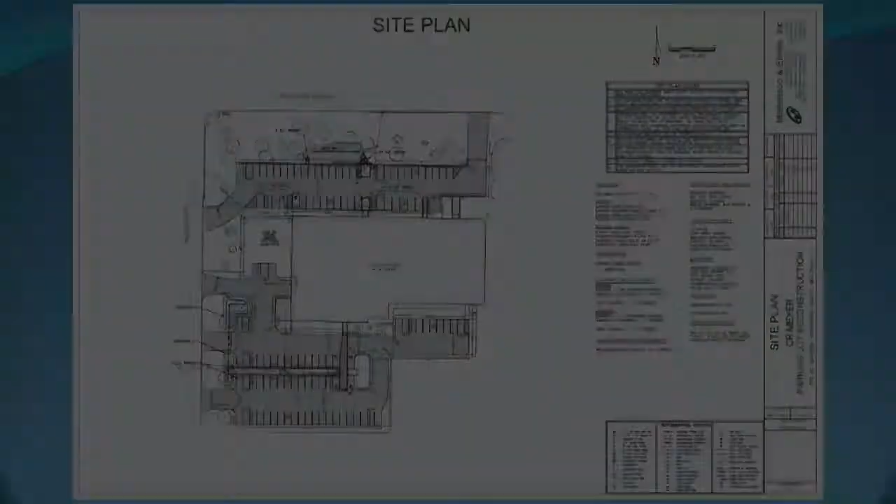Planning reviewed this and initially did not see any concerns, as it's just a replacement of what is existing. Public Works reviewed it and noted support for the variance provided the parking lot configuration and use warrant the need for all existing access points to remain per the site's current operation practices. However, after our staff report was sent out, we received notification from them that they would like to see one of the driveways along Knapp removed. So staff is recommending approval of the access control variance to increase the number of permitted access drives from a local street from 2 to 3 rather than 4 as proposed.

All right, thank you. Technical questions. Has the petitioner been told that? We just found that out today, so we were hoping Mr. Garrick from Public Works would be here as well, but the petitioner is here. Oh, so we'll hear about that later. All right, technical questions?

All right, anyone here from the public to speak to this item today? Yeah, I'm Kevin Force. Come on up, sir. Tell us your name and address, and then tell us your thoughts.

Kevin Force, 895 West 20th. So I'm part of this building.

The 4 existing driveways, if you've ever seen the post office traffic over in that area, they come in there with the big semis. We could actually come in there and have 2 of our driveways blocked by semis when they're waiting to get into their access.

Obviously, we can't live without the north one. It's our only safe access really to get out on 20th. Otherwise, the north parking lot is trying to all get out across 20th or intersecting 20th, which at times when Oshkosh truck traffic is coming down the road, it can end up being a nightmare in there.

Driveway number 2 is, we take deliveries in there occasionally by semi or larger panel vans. That gives them direct backing access into that drive. If we would give up that one, we'd have no access to our overhead door.

Driveway 2 and 3 also work with our dumpster situation. Driveway 2 is used to snag the dumpster that sits in the enclosure to the right, and then he circles out without having to back out onto Knapp. Driveway number 3 allows him to come in, pick the dumpster that sits on the left-hand side of our dumpster enclosure, and then drive out driveway number 2 in order to avoid, again, backing out into Knapp.

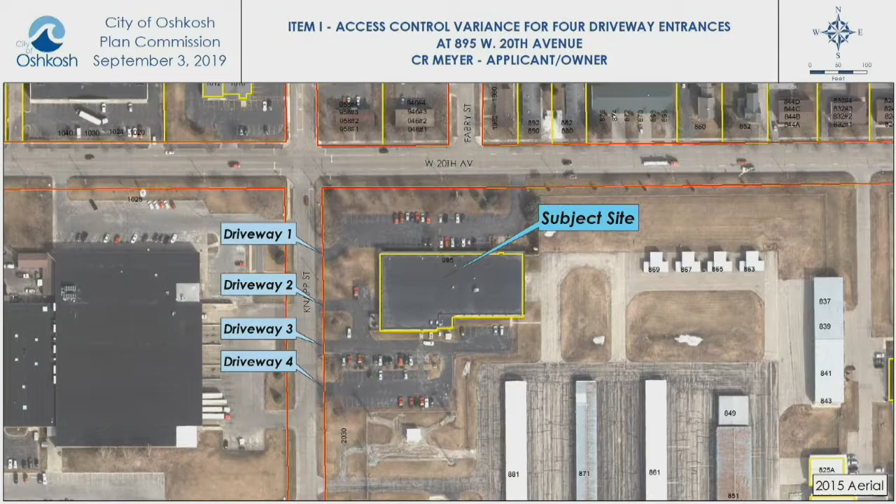Thank you. Okay, we have a motion on the floor with a second to allow them a 4th, going back to the original. Any further discussion on that? Then let's call the roll. Hintz, aye. Kiefer, aye. Palmieri, aye. Perry, aye. Mitchell, aye. Crab, Erickson, Ford, aye. Wojtek, aye. Motion carried 9-0 with amended condition, or sorry, amended motion.

No need to apologize. On to item number 2, a 2-lot land division and certified survey map located at 1732 Knapp Street. Any site inspections for this one? Okay, we've got a couple. We do accept the staff report as part of the record.

Starting in 2015, the city's consultant AECOM has done a site analysis to determine the extent of methane gas emanating from the site, and determined that these 5 properties are required for the city to move forward with its mitigation efforts. The subject property is a 2.25 acre property, developed with a single-family home, very close to Knapp Street, and also built out with associated accessory structures. The site is unusually large for single-family development, being 2.2 acres in size, approximately 636 feet deep by 180 feet wide at its widest point. The surrounding area is generally single-family in nature, with the exception of a school to the west and another former landfill site to the north, which is Quarry Park. Quarry Park also has seen methane gas remediation efforts by the city.

It is 1.36 acres in size, and the lot exceeds the minimum base standards of the SR5 zone district in regard to width, depth, and area. One little thing missing on the submitted map - I'll go to the certified survey map. The surveyor failed to show a small right-of-way dedication over here, which was platted in the early 1960s to place sidewalk around some existing trees. You can see that little notch out right there, so that will be communicated to the surveyor to correct that error.

Proposed lot 2 is rectangular shaped, and this is the subject site or area the city is looking to acquire for its methane gas remediation efforts. The lot is 215 feet deep, 180 feet wide, and just shy of an acre in size, and again meets all the minimum SR5 base standards.

One item of concern is this is considered a landlocked parcel, which means it does not have direct right-of-way frontage. The subdivision regulations require a 30-foot right-of-way access, and this fails to meet it. So they have two options to fix that: either acquiring a variance from the subdivision regulations to create the landlocked parcel, or option 2, the lot can be shown as an outlot on the final map.

Per state statute, outlots are lots not intended to be developed as a building site, and are generally intended to remain vacant or undeveloped, usually due to environmental or dimensional constraints on the property. The city does not have any plans to construct any type of structures other than methane remediation facilities, so staff is recommending changing lot 2 to outlot 1 on the final map.

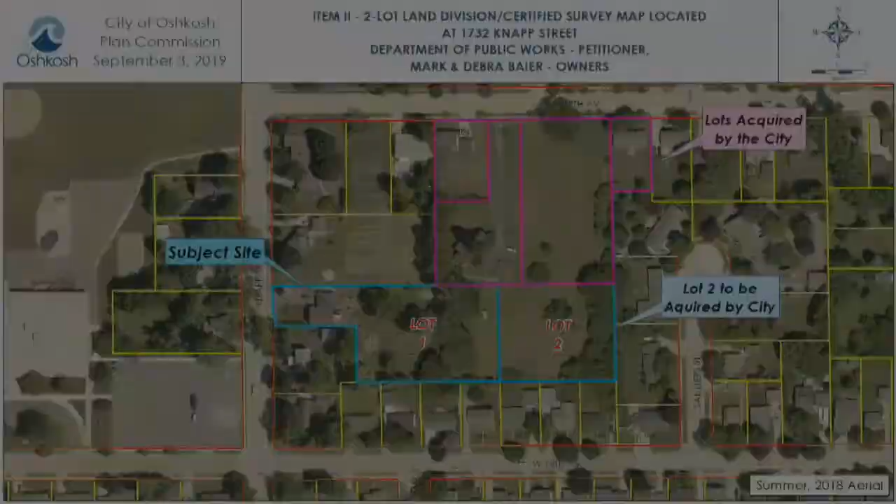This next slide is an aerial photo from 1937 showing the quarry operations, being used as a quarry at that time. You can see the 4 lots that the city has already acquired over here, and then the back portion of the subject site, which the city is in the process of acquiring, covers pretty much the entire quarry operations.

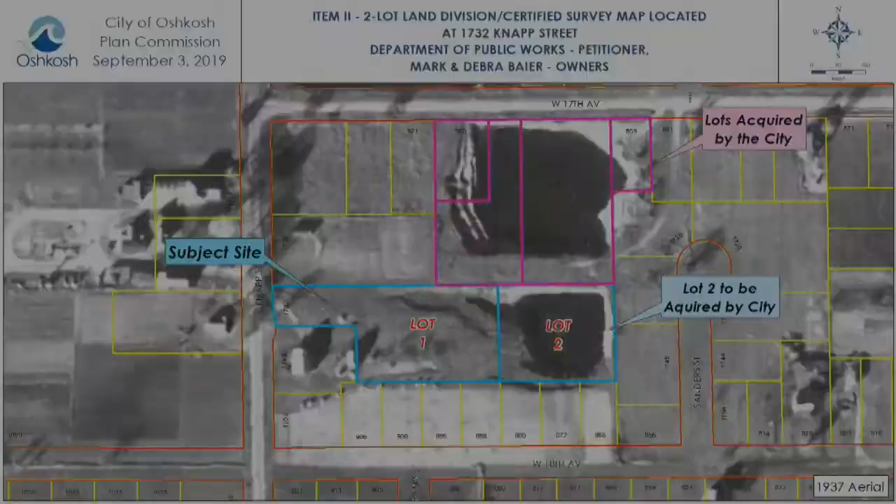The Department of Public Works reviewed the CSM and did not have any other issues other than the shared concern with lot 2 being landlocked. So with that, staff is recommending approval of the 2-lot land division with one condition: changing lot 2 to outlot 1 on the final CSM.

Thank you, sir. Technical questions? Kathy, and then the mayor.

What is a methane gas remediation facility going to look like? Public Works Director James Rabe is coming up. It will look very similar to the installation on the west side of Knapp Street at the former Knapp Street quarry, across the street from Quarry Park, where there is a system as well.

Jeff, do you have any of the air photos that could show that? Zoom in on this one here. I saw something with a fence - yep, that's it. It's an underground perforated piping system that goes into a fenced-in area where there are pumps that apply a vacuum to that perforated system to draw the methane out of the ground and then vent it.

So it would look like kind of an informal fence, like the one on Knapp Street. Would the facility look the same? It would look very much the same. I don't recall the exact design off the top of my head, but it would look very similar to that.

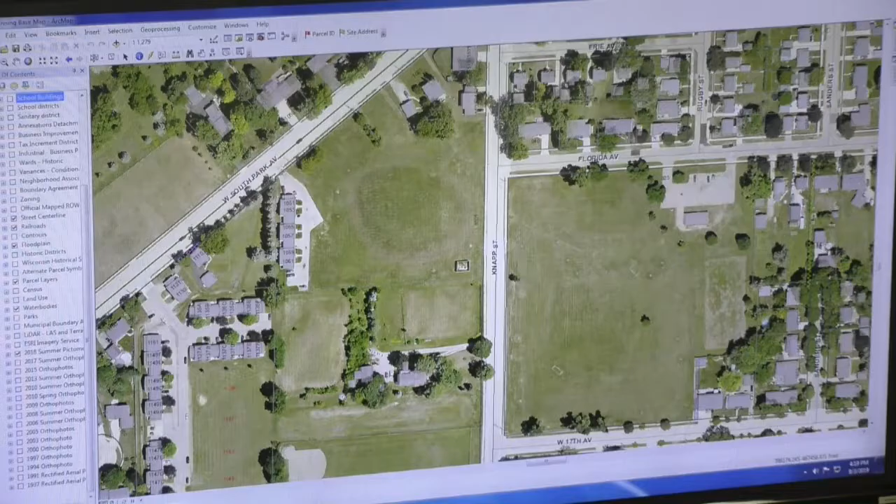Locationally, we are currently planning it to be installed somewhere near the vicinity of the current house location at 885, so it will be set back from 17th Ave quite some distance. That's where the garage is, and the house is a little - yep, that's where the house is. So it's somewhere in that general location is where it will be installed.

More questions? Yeah, go ahead. Will this take care of the possible dangers to the neighborhood now, or is there a possibility of other properties being affected? Jeff, if you could bring up the air photo from '37 again, please. The outlined northern quarry was the former Keenest quarry, and the southern quarry is the former Paulus quarry. Both of those were filled.

We know the former landfill was filled with municipal solid waste that generates methane as it decomposes, and some of that methane has worked its way into the former Paulus quarry, which is why we're also looking to acquire that land and get the methane extraction system around there.

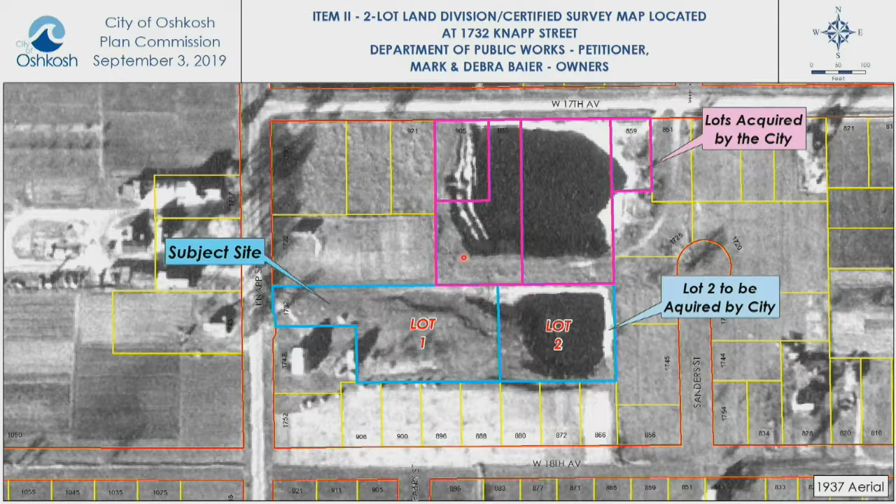The intent of the system is that it goes around the perimeter of the landfill so that there are no materials outside of the trench system that would be generating methane. Everything is generated from inside that system, and the site is completely encircled.

Because Paulus is not generating methane, our initial plan will be to construct 3 sides of that system and continue to monitor the monitoring wells on the southern end to make sure we are seeing those reductions, and if not, we'll close the loop.

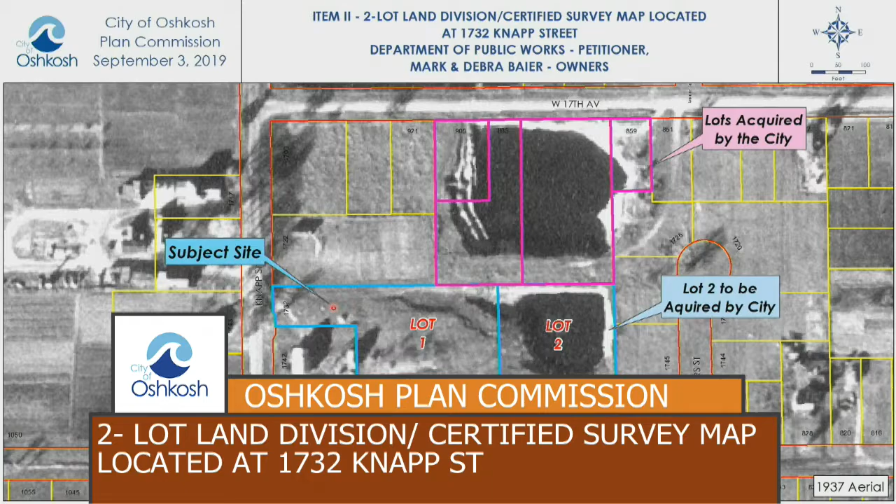Thank you. Mayor? Just a technical question. So we already have lot 1, right? No, lot 1 is still privately owned, this one here. Yes, and there are no plans for the city to acquire that piece. Okay, all right, I guess go back to that.

Then could lot 2 just be combined with the northern one and it just inherits that? Or do we have to? At the time of creating the lot, you have to be able to create that lot legally - it must meet one of 2 requirements first, either being an outlot or a subdivision variance. The CSM could not continue without that portion of it first.

Okay, so we would in effect be combining it and calling it an outlot? Correct. Okay, the simplest way to do it is just simply call it an outlot, and it solves the problem.

Gotcha, okay. Then afterwards, the city could combine all 5 lots into one. Once we have ownership of all of them, we need this CSM approved so we can buy the subject lot 2, or outlot 1 as you're discussing. Then once we have ownership, we could look at combining the entire thing, merging them into a single city-owned separate parcel via CSM, but we've got to get them under our ownership first.

Other technical questions? Are there other properties you're looking to acquire, or is this the last? No, just those 5 that are highlighted in magenta. As of last week, all 5 of those have been closed. We're still working on relocation of 2 of the property owners, and then this lot 2, or outlot 1 of this CSM, will be the last piece.

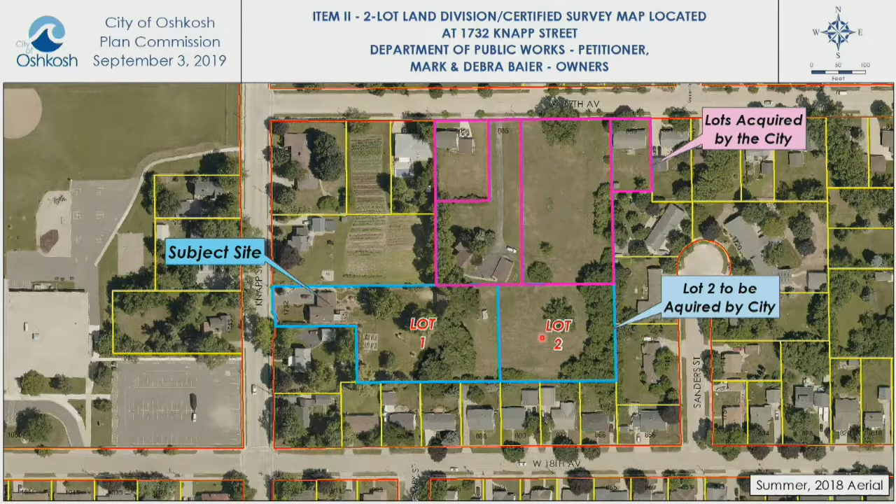And then last question, what is the lifespan of a mitigation system? The mitigation system, with its construction - perforated polyethylene piping and a gravel trench system - has a very long lifetime. We will continue to monitor the site just as we have been with Knapp Street and Quarry Park, to see if we can eventually switch from an active system, which has pumps that apply suction to suck it out, to a more passive system.

To date, we have not been able to do that with either Quarry Park or Knapp Street, so we will continue to operate that active system.

So I have some sort of timeline - is there any point ever that this converts back into park space or developable land, or will it never convert to developable land? Because of it being an old landfill, it will never be developable. But just as Quarry Park is open park space now, even with the system installed, that is a possibility, but it can never be developed.

Thanks. Other technical questions? All right, thank you, James. Anyone here from the public to speak to this item today? Seeing none, back to the commission.

We need a motion. Motion to adopt the findings and recommendation as stated in the staff report. Second. All right, it's been moved and seconded. Discussion? Hands are not raising, so let's call the roll.

Hintz, Aye. Kiefer, Aye. Palmieri, Aye. Perry, Aye. Mitchell, Aye. Prop, Aye. Erickson, Ford, Aye. Wojtek, Aye. Motion carried 9-0. Thank you very much.

I'm told we have news on item number 3. It's a public hearing conditional use permit request to establish an outdoor storage use at 3135 Oregon Street. So after staff had submitted the staff report to Plan Commission, the applicant is requesting that we hold this off for 2 weeks.

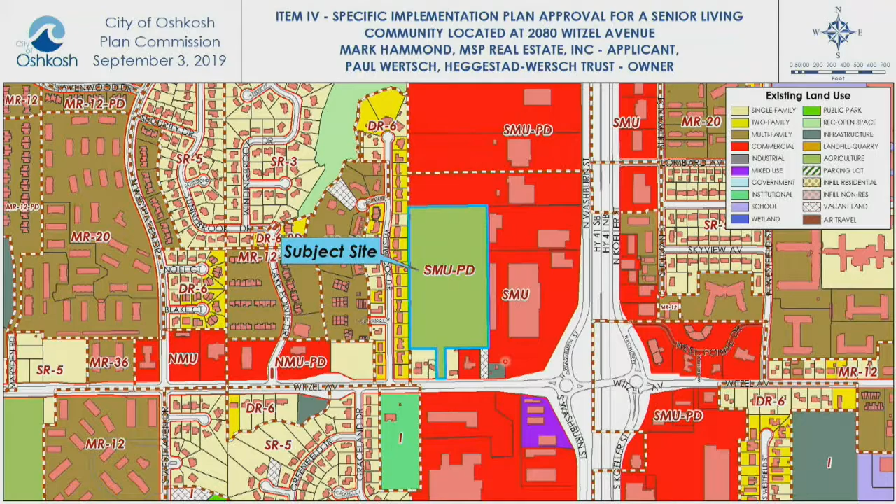So this is an SIP request for a senior living community. The site is zoned SMU PD and consists of one parcel about 14.5 acres in size, located on the north side of Witzel Avenue. The surrounding uses are commercial to the east, and some residential uses to the west.

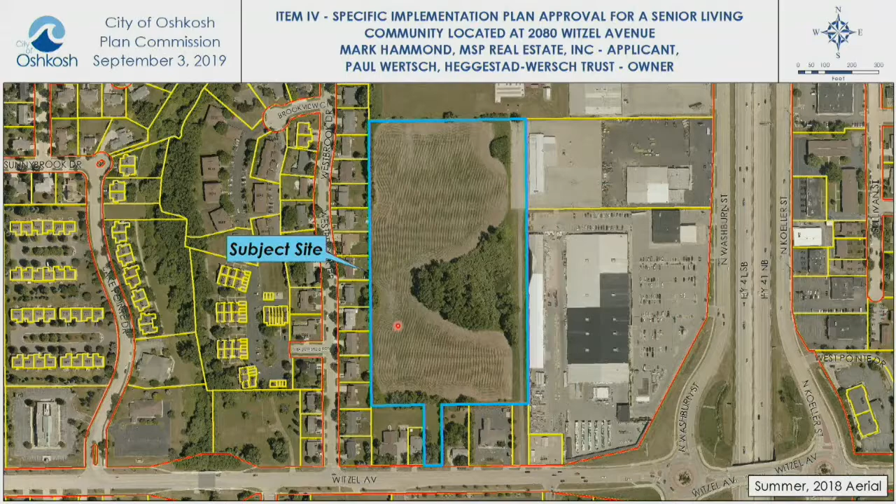Here's an aerial view of the subject site. On April 9th of this year, Common Council approved a general development plan for a senior living community, and that applicant is now requesting SIP approval for Phase 1 of the development of the site. Phase 1 is shown here in the darker building area.

So Phase 1 is a prominent initial development of the site. It includes the main entrance area, 30 memory care units, 43 assisted living units, 50 senior apartments, kitchen, dining, activity, and management areas. Phase 1 includes a total of about 26.2% impervious surface area for the site.

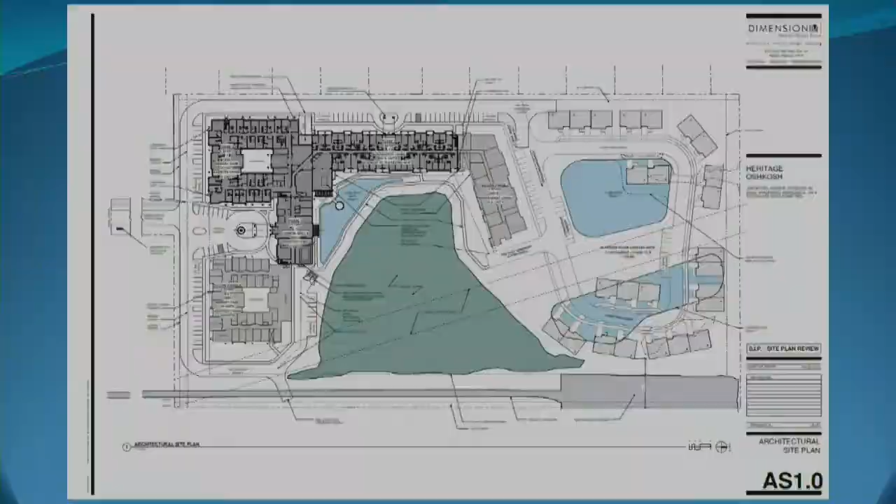It will be served by a single access point from Witzel Avenue and will include 50 underground and 81 surface parking stalls. Here's the site plan, here's the access, here's the building area and the parking for the site, as well as the access to underground parking.

The 131 stalls being proposed meet the minimum requirement of one space per employee in the largest shift for memory care and assisted living, and 2 spaces per unit for independent care, as laid out in the GDP. The building and pavement areas meet setback requirements with the exception of a truck turnaround, which extends into the 10-foot pavement setback to about 6 feet from the east property line.

The Oshkosh Fire Department did request that the turnaround remain in place to allow for circulation of fire department vehicles. So staff is recommending a base standard modification to allow for the turnaround to extend into that 10-foot pavement setback.

There's pedestrian access being provided from the parking lot to Witzel Avenue. The required 4 bicycle stalls have not been provided, but that can be addressed as part of a site plan review process. Revised stormwater management plans were submitted as part of the SIP process, and Public Works informed the applicant that drainage to the wetland is allowed.

However, a drainage path to the right-of-way or waters of the state is required, and the final stormwater management plans will be approved during the site plan review process.

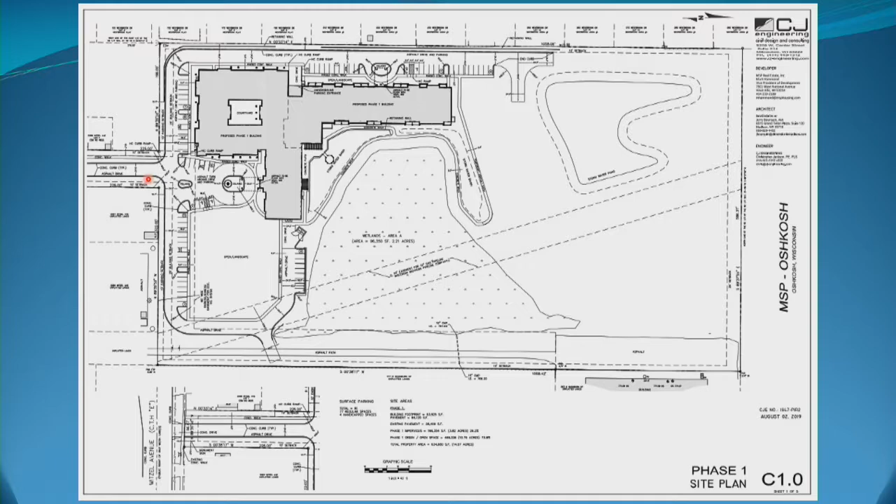The GDP noted that the buffer yard along the west property line needed to be altered to meet code requirements for type and location of buffer yard trees, and it also included a condition that the properties at 2092 and 2088 Witzel must be screened with a 0.4 opacity buffer yard. So that's along this property line here.

There's a combination of 6-foot tall wood fencing being proposed with buffer yard trees. Along the west property line, they're proposing Mountbatten juniper trees for that buffer yard, and that's considered a low evergreen, and code requires tall or medium evergreen trees for screening. So staff is recommending that the Mountbatten junipers be replaced with a tall or medium evergreen tree along that west property line.

Along the south buffer yard, there are eastern red cedar and Serbian spruce trees being proposed, and they do appear to meet the point requirements for that buffer yard. Along with this, a minimum of 50% of the required points must be located on the exterior side of that 6-foot tall solid fencing, and that can be addressed during site plan review.

There was a sign plan submitted which included an 8-foot, or 5-foot 8-inch tall brick monument sign shown here, and that actually appears to be located within the front setback area. So that will need to meet the front setback of 25 feet. But it does appear to meet size requirements for monument signs, and that can be addressed under a separate building permit.

A lighting plan was submitted, and it did appear to meet photometric plan requirements and lighting fixture height requirements, so there's no concerns there. Here are the building elevations.

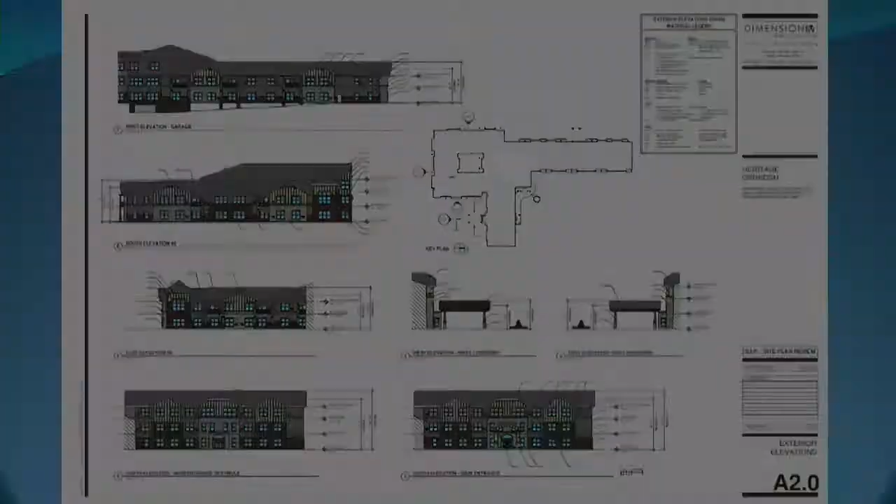The final building elevations do appear to meet city standards. There actually are no standards for institutional uses, but we did review them in comparison to multifamily design standards, and they do appear to meet those standards and are clad primarily in a mixture of stone, brick, and fiber cement siding. There is also sufficient articulation and window area for the facades. A view of these facades.

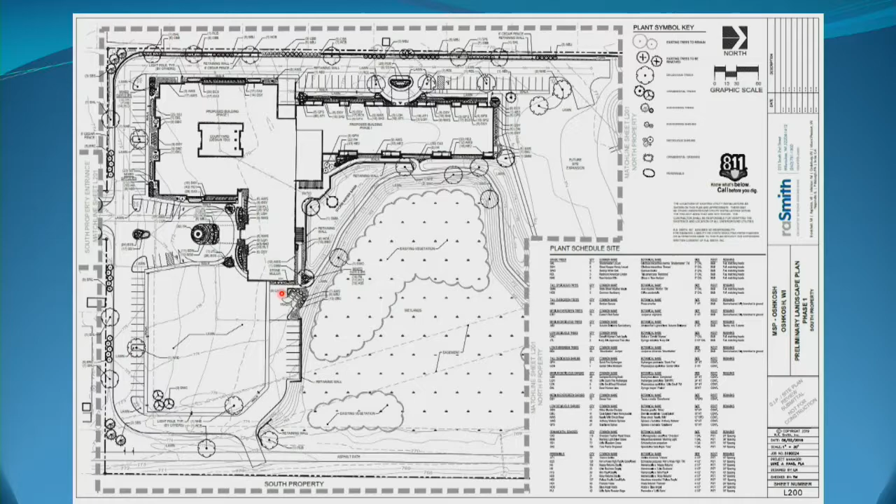There's a refuse enclosure being proposed to the east side of the building. That will be 6 foot tall with a brick veneer to match the principal building materials and a solid cedar gate for access. So staff does not have any concerns with the refuse enclosure.

Staff recommends approval of the SIP as proposed with the findings listed in your staff report and the conditions of a base standard modification to allow a 6-foot setback from the east property line for truck turnaround, where code requires a 10-foot pavement setback, and the final landscape plan shall be approved by the Department of Community Development.

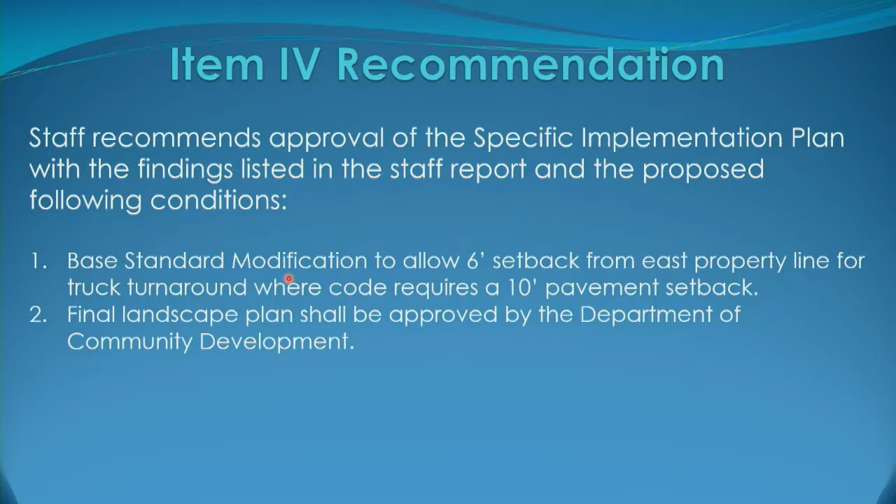Thank you, sir. Technical questions? Mayor? Page 8, where the breakdown is on the parking. So it looks like we're requiring 102, but they're providing 131.

This was their kind of outline of what they say they need. Staff actually reviewed it against the code requirements as outlined in the GDP, and they have enough. How they get to their number is a little different than the zoning code, but ultimately they match up at the 131 being sufficient for the code requirement. So their breakdown of how they think they use those 131 is a little different than what our zoning code outlines.

Okay, so there's a range there, is what you're saying? Correct. Okay, because it looks like they're trying to be pretty judicious and then added more on, so I guess. Yep. All right, that's all. Other technical questions? Go ahead, Justin.

The wetland space that's on the layout that they have, kind of the center of it, is that the same footprint, so they're not changing any of that? They're not, I don't believe they're intending to do a whole lot with the wetland. I know we can ask the applicant specifically, but none of the developed areas are currently wetland, so the wetland that's there on that map is kind of what's staying now, to the outside of it.

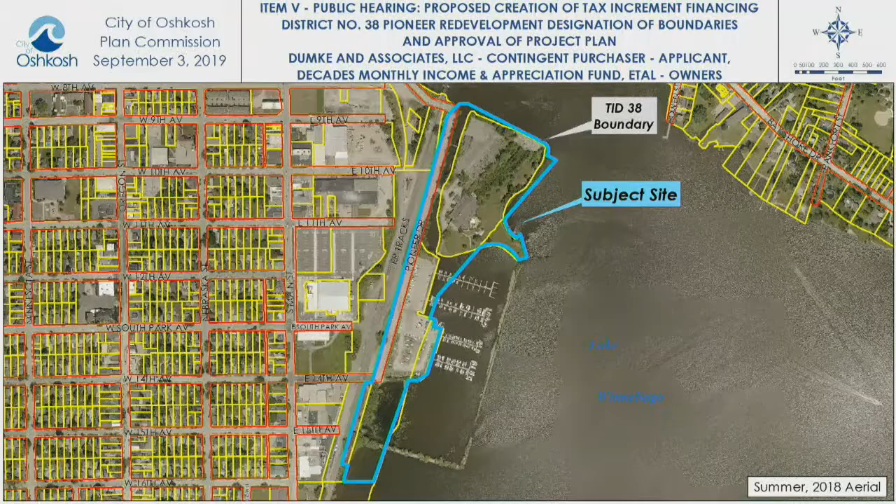Yeah, so all of that is Pioneer Drive, and that is anticipated to be removed - that's right there, correct. Okay, so 9th would be the main thoroughfare that serves this area. Yeah, everything basically - Pioneer Drive east of Main Street would be removed to approximately where the new 9th Avenue comes in. That would end up becoming almost like park space along the river, potentially a linear park along with the Riverwalk.

All right, any other technical questions? One of our finer discussions. Go ahead, Justin.

It states that the $29 million is needed because development has not occurred in the last 15 years - that's in the blighted commentary section. I had chatted with the city manager maybe 6 years ago, and he indicated there's really not a whole lot the city could do there because it was private property, so maybe some steps have been taken. But is there a list anywhere of the efforts to redevelop that property over the last 15 years? It's not listed in here. It's just maybe taken for granted that it's blighted because development hasn't occurred in 15 years, but maybe no effort has been put in. So it's been privately held, and they have not been able to make development work.

The city had been in close communication, at least since local developer Art Dumke acquired an option for it, meeting with him at least once a quarter, if not more, trying to work on a development. He's had that option for close to 5 years now. Before that, it was privately held for decades - the city was still making efforts to work with that owner, but has been more engaged since Mr. Dumke has had the option and looks forward to redeveloping it. So in general, there's no detailed report showing these efforts that led to the determination that development is not possible without $29 million of assistance on 20 acres of prime waterfront real estate in the city.